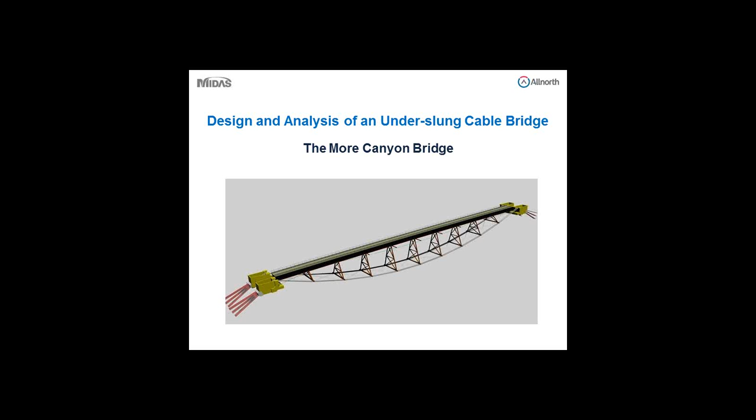The main topics we'll be discussing today are the challenges involved in the design and construction of an underslung cable bridge. These challenges include the derivation of the main cable shape and length, the construction sequence of the semi-rigid structure, the girder launch itself, and the dynamic response of the bridge under wind and live load.

Do you have a question?

Hello. The owner of the bridge are the Galore Creek Mining Corporation.

Okay, actually, we'll answer that question at the end. Okay.

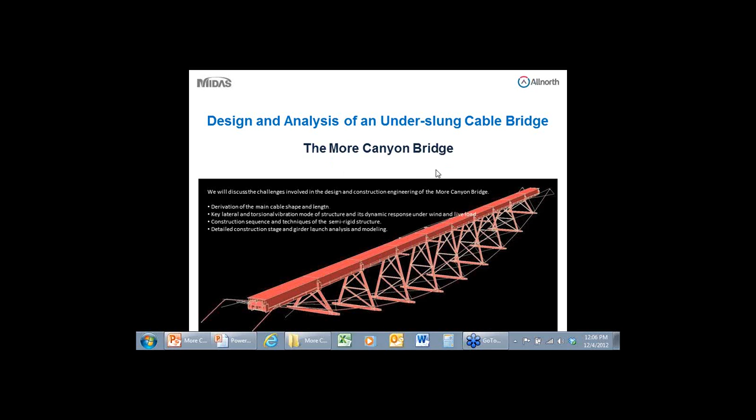Before we start on details, let me give you a brief description on the background of the project. The More Canyon Bridge is a part of the Galore Creek Mining Project located near northern BC, near Bob Quinn and Stewart. It's part of a mining road that will service the Galore Creek mine.

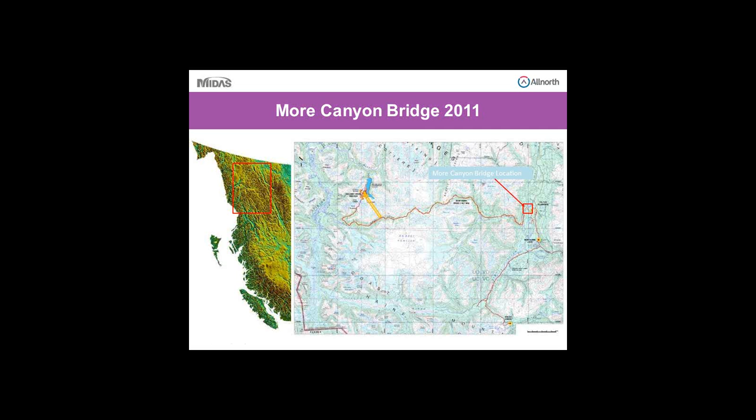The More Canyon Bridge will span an 80-meter deep canyon. It's a 200-meter clear span underslung cable bridge. Apart from the geography of the site, the project is complicated by high winds, which are funneled down the canyon, heavy snow accumulation during winter, and a steep mountain rock face.

Now, this meant that any work to be done would preferably be limited to the top of the canyon. The underslung cable design satisfies the criteria. The bridge should be constructed at the top of the canyon with skylines and the main girder to be launched onto the semi-stiff structure composed of the main cable and the launch girders.

Now, due to the nature of the design, the bridge requires a unique construction sequence and could potentially be sensitive to wind and live load. Because of these concerns, a comprehensive study of the dynamic response of the bridge was completed during the design process, resulting in a design that greatly exceeds a scope that's typical of a 30% design.

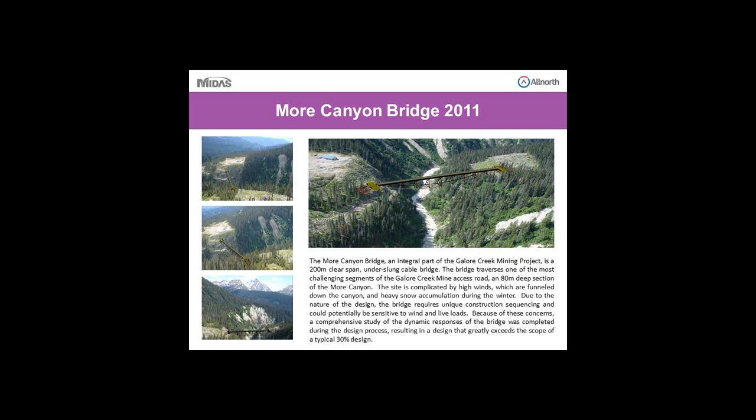Now, the bridge is composed of two 2.5 meter deep composite main girders supported by vertical struts at 20 meter intervals. The main cable system consists of two groups of four 105 millimeter diameter cables. Now, these groups of cables sit 14 meters apart and are cross-braced with 35 millimeter diameter cables to provide a strong lateral truss system. In addition, there's two 75 millimeter diameter wind cables at the elevation of the girder.

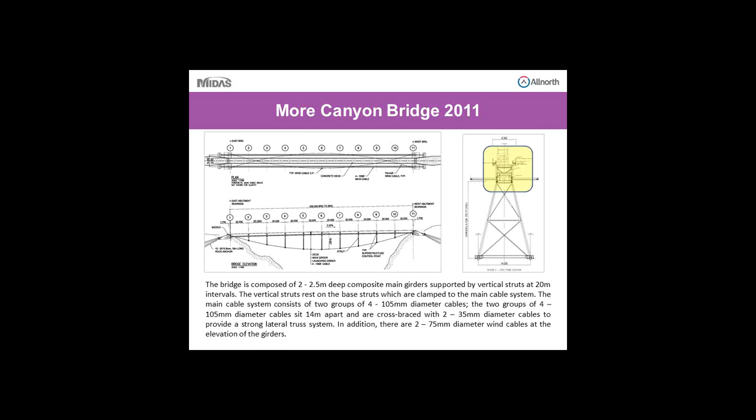Let's have a closer look at the roadway detail. Here we have the composite main girders supported by vertical struts at 20 meter intervals. The main girder sits on top of the launch girders.

We'll later see how the launch girders will first be erected to create a semi-rigid structure as a base platform for the main girder to be launched over. The height of these vertical struts varies from 4.7 meters nearest to the abutment to 17.3 meters at the midspan of the structure.

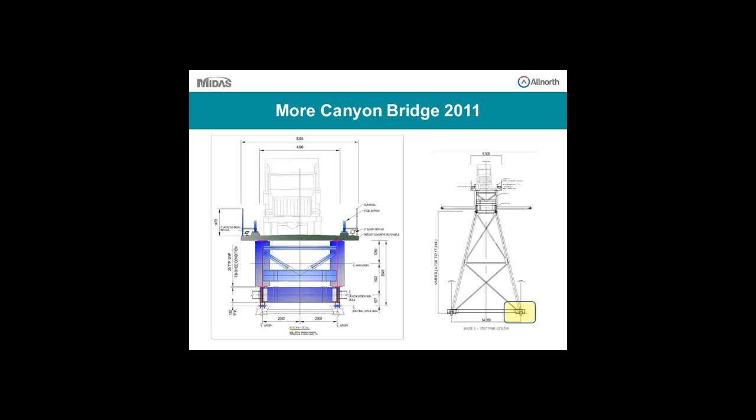At the bottom, we have the struts sitting on the base strut units, which are clamped to the main cable system. Here we can see the rendering of the base strut and clamp system, as well as the cross-bracing cables. The cross-bracing cables are both over and under the main cable system. Now this ensures that all resultant forces will go through a common work point in the system.

Initially, the strut beam was designed to be hung from the main cables. You'll see that in most of our model studies. This design was later changed in favor of having the struts sitting on top of the main cables.

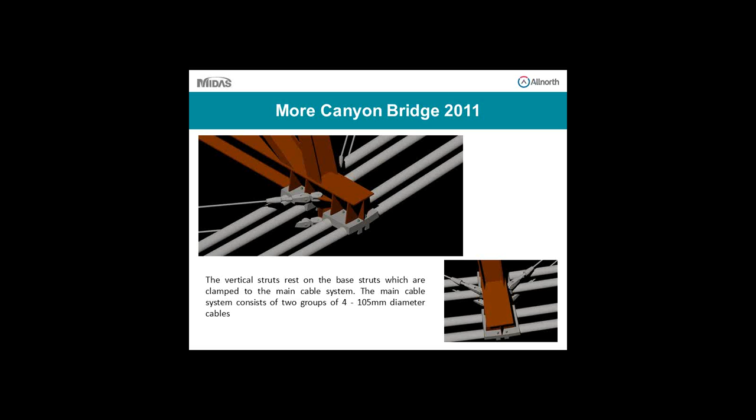A key component of the More Canyon Bridge project was the implementation of MIDAS as the primary analysis software. MIDAS excels in the analysis of cable structures with an accurate ability to model the nonlinear behavior of the cable stays.

With the shape and length of the cable highly dependent on the weight of the bridge, an accurate accounting of the bridge elements and their weights were established early in the project. And we wanted to use the suspension bridge analysis control in MIDAS to derive the main cable length, shape, and tension in the final condition.

An obvious difference between the underslung cable system and the suspension system is that the tension forces in the hangers are compression forces in our case, in the struts. Other major differences also include the absence of backspans and towers.

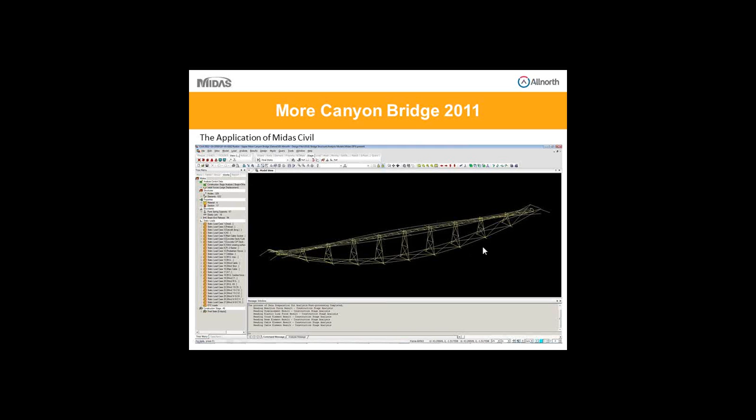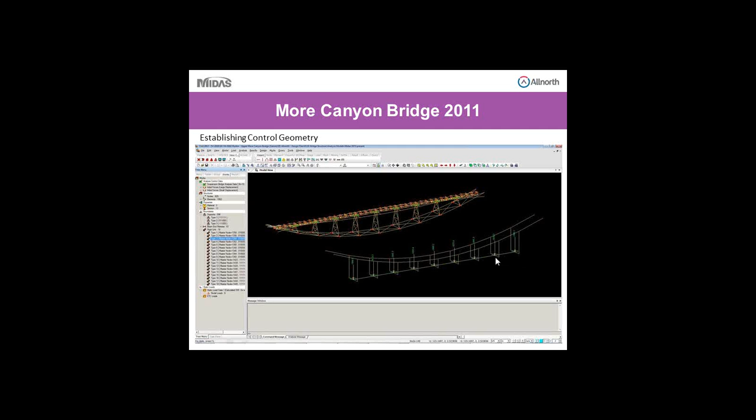Due to these differences, or just our input error, the suspension bridge analysis control was initially unable to compute the shape and tension in the cable based on the underslung arrangement. So we created a suspension model based on our dimensions, along with the calculated dead loads applied along the bridge. We ran the suspension bridge control, and it gave us the shape of the cable and the initial stresses. We then took the cables, deleted the suspension elements around it, and surgically connected the cable to our structural system.

This establishes the first iteration of the forces in the main cable. They include the equilibrium element nodal table, the initial force for geometric stiffness table, and the initial force table. You can find a tutorial from MIDAS on how these tables are produced.

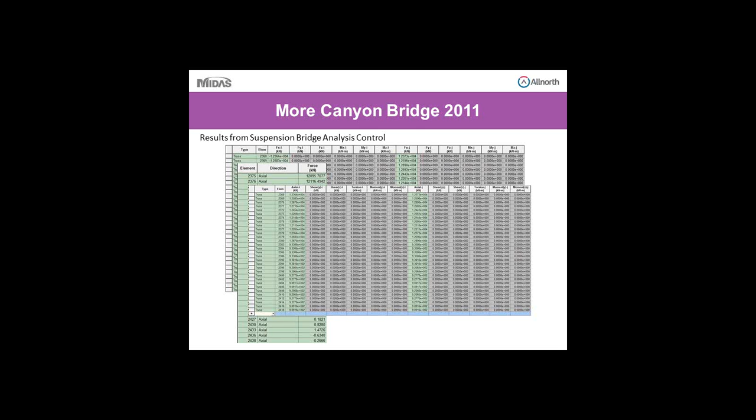With the use of the suspension bridge analysis control to determine the control geometry of the bridge, this is established under an idealized suspension system, where the deck and the main girder is only used to account for the weight and not for the stiffness. So having established the initial forces and the shape, we introduced the data into the construction model.

The basic boundary setup of the construction model is shown here. We have pin support at the end of the cable where it's anchored in rock anchors, and roller supports at the end of girders. Also roller supports to simulate the saddle over the abutment back walls.

Here you can see a rendering of the saddle structure. The strut frames are hinged at the top where they're connected to the bottom of the launch girders, and the launch girders are hinged at their end, so they're simply supported spanning between strut frames.

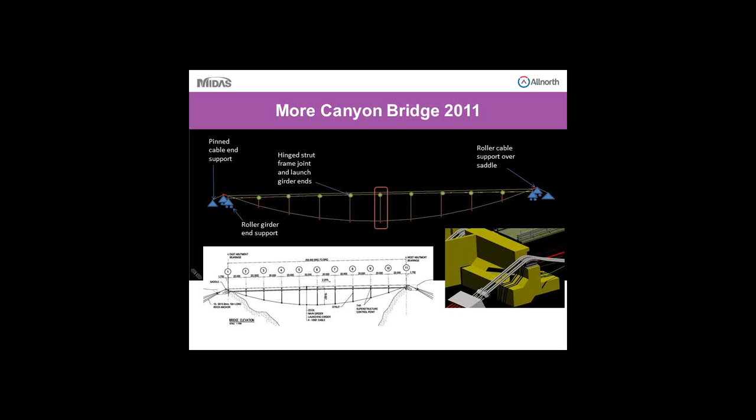Let's have a closer look at the cross-section of the bridge. As mentioned before, in an earlier version of the bottom strut beam design, the bottom strut frame was to be hanging from the main cables. This makes for easy construction because the bottom strut beams will naturally want to hang plumb, making installation with the strut frames easier.

But the hanging pendulum effect will lead to no convergence in the model due to the fact that there are too many degrees of freedom in the system. We get around this problem by using an elastic link between the cable and the bottom strut unit and adding torsional stiffness in this link.

We used a single line element to represent the group of 4 main cables at each side of the bridge. This element is located at the geometric centroid of the cable group.

We also used a single line element to represent the two composite main girders. This was done in order to properly capture the torsional stiffness of the box that's created by the main girder and its lateral bracing system. The torsional stiffness of the box cannot be captured by simple line elements laced together by bracing members.

The torsional stiffness of the main girder system was captured by creating a separate model, modeling the girder and the deck using shell elements laced together with lateral bracing elements, then applying a unit torque at the end of the box, which induces rotation.

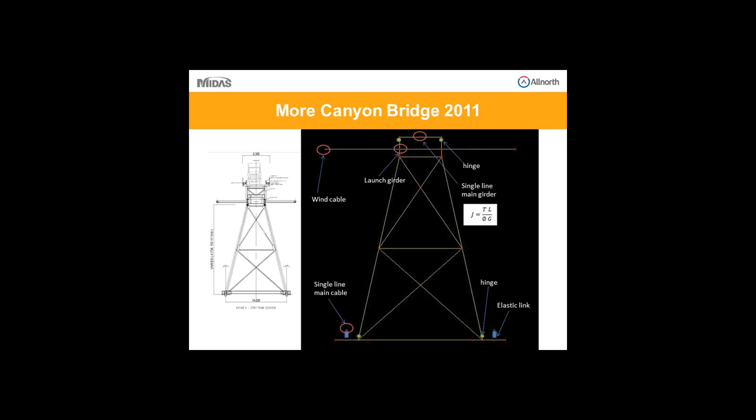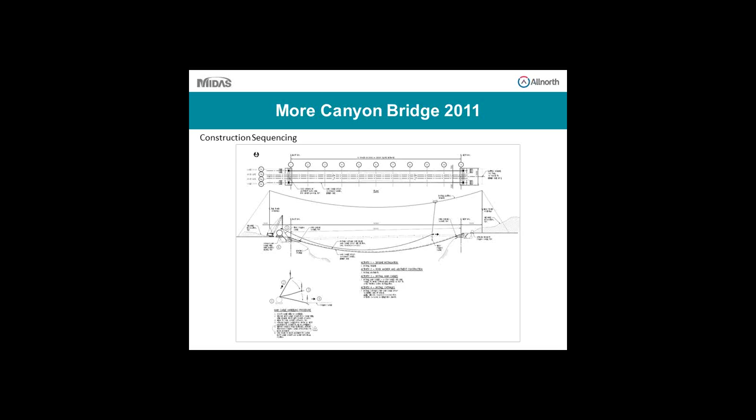It all starts with the construction of the abutments. Groups of 15.9 millimeter diameter strand anchors are embedded 18 meters deep into sound rock. These will provide an anchorage for the main cables.

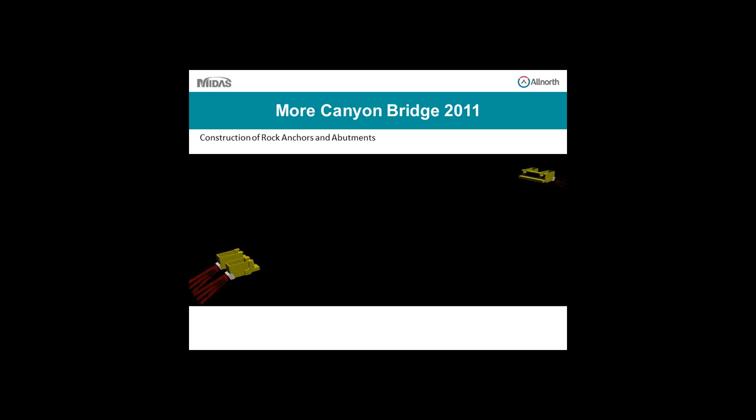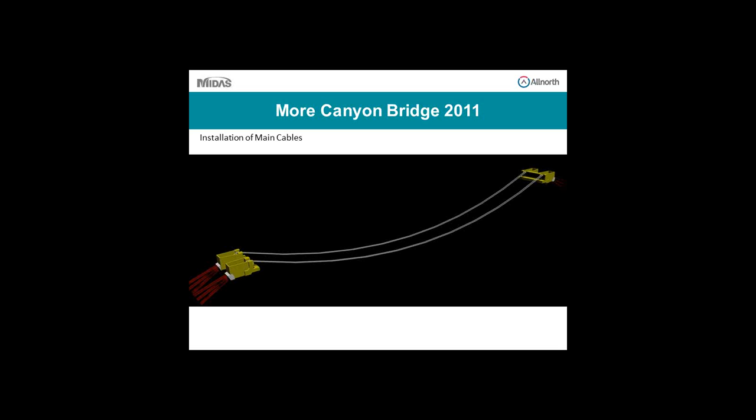105 millimeter diameter main cables are laid into position one by one. Now, the initial position of the cable is approximately 1.2 meters higher than its final position due to the lack of dead load at the initial stage. Additional dead loads coming at a later stage will induce tension in the cable, hence elongating it.

Catwalks made of timber and welded wire mesh will be installed along the two groups of main cables, creating a 1.8 meter wide work platform along the two sides of the bridge.

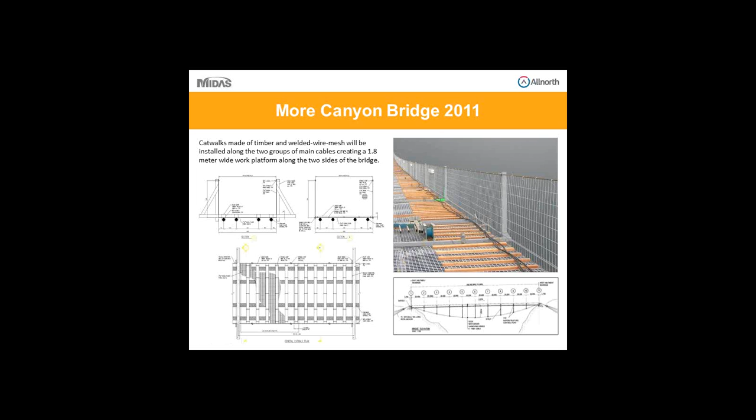The bottom strut beam, along with cable bracing, are installed bay by bay to create a strong lateral truss system and a base platform for future work to be built on.

The exact location of the bottom strut beam will be marked on the cable prior to shipment. This is done because the length of the cable will change depending on the construction stage, as well as the elevation of the cable will change.

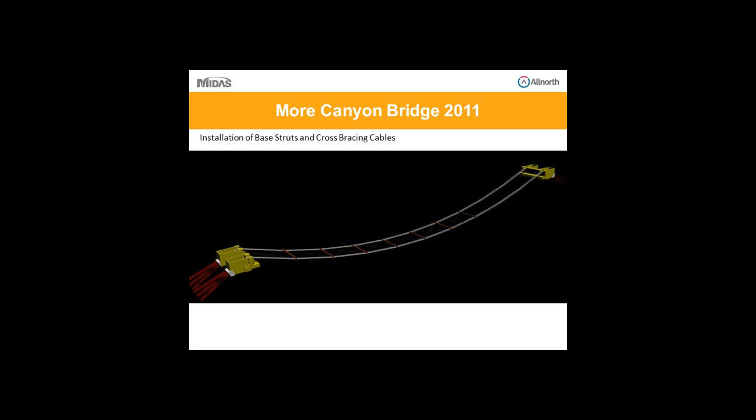Preloads of approximately 8 tons will be hung at each end of the strut beam. The preloads apply additional weight to the system. They stretch the main cable, making it stiffer, and also close the gap between the final stage elevation and the current stage elevation. This elevation change is required due to the rotational tolerance on the members to come.

Keep in mind that each joint installed at the construction stage will need to allow for rotation due to the constant changing of the geometry of the bridge.

The preloads may either be bags of sand, lock block, or water. With these preloads, we can create favorable geometry for future construction stages by adding or removing preloads at certain locations in order to raise or lower the position of bay lines.

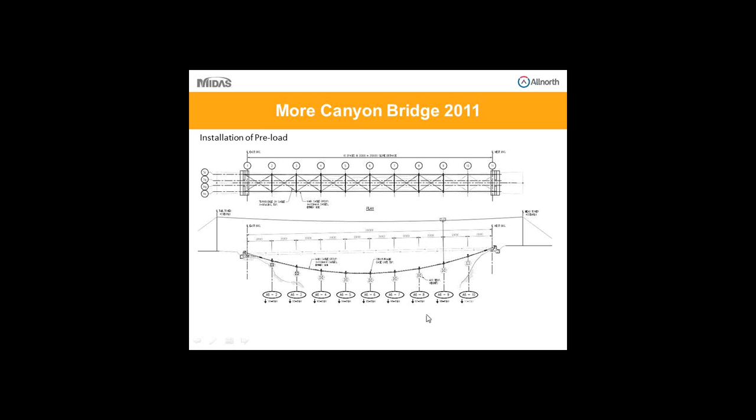The strut frames, as well as the launch girders, are installed bay by bay, starting from bay line 10. The launch girders are installed with a hinge at each bay line so that the system is flexible. The launch girder and the strut frame are to be lifted at once along with their bracing system.

The free end of the launch girder is pin connected to the adjacent launch girder. The system is then slowly lowered onto the bottom strut beam with Tirfors to ensure that it's in line with the bottom strut beam.

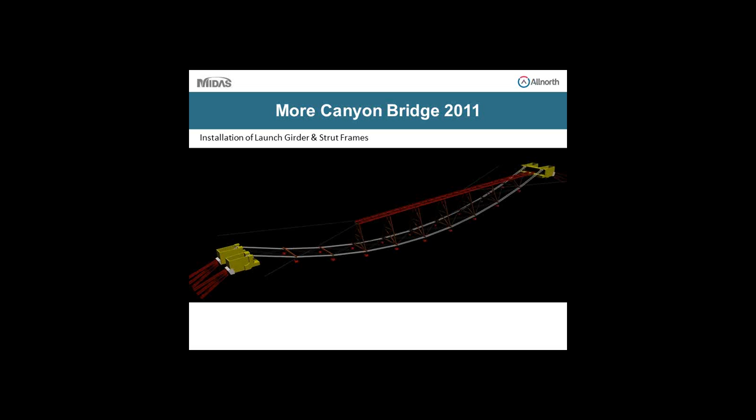The angle at the top hinge at each stage of construction is checked through modeling to ensure that no clashes occur. Cable saddles have a radius on them. By checking and keeping the cable within that radius, we ensure that no excessive stress is applied on the cable during the construction stage.

Wind load at the construction stage is particularly a big concern due to the fact that a significant amount of weight and surface area is added to the structural system, whereas the lateral system of the launch girder cross bracing is incomplete until the last segment of the launch girder is installed.

So during the wind event, the launch girder is essentially cantilevering from the fixed support, that is, from the west abutment. At this construction stage where the launch girder can experience the largest deflection, in order to reduce this deflection, wind cables are introduced into the system.

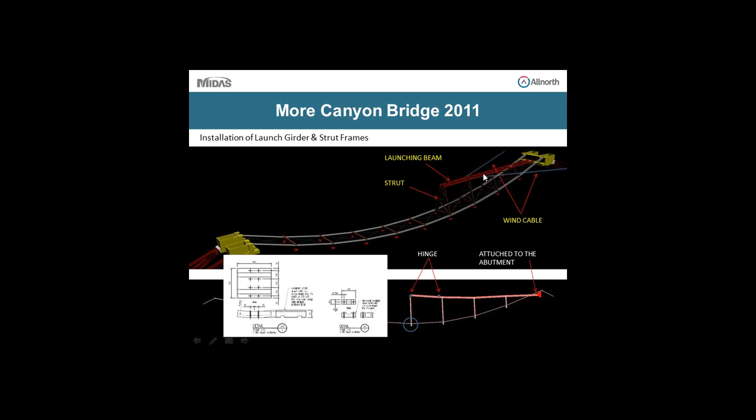Here we can see some lateral deflection results produced in MIDAS at the stage of construction, where the strut and the launch girders are constructed just past the midpoint of the bridge and also just before reaching the east abutment of the bridge.

You can see that the lateral deflection at the top of the truss reaches up to 740 millimeters in the most severe case, and also see how the cable and the strut system rotate to accommodate for this movement at the top, due to the difference in stiffness of the completed main cable system and the incomplete launch girder system.

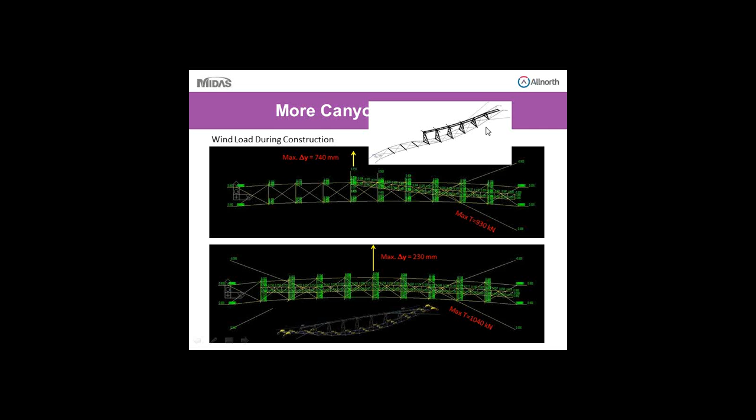Next, the wind cables are installed, strengthening the lateral bracing system at the girder level prior to the main girder launch. Now that the launch girder is complete with its lateral bracing system, it will become a launch platform along with the main cable system.

To simplify each of the models that we're working with, the construction stage model was broken down into 3 models: the pre-girder launch model, the girder launch model, and the post-girder launch model, which also includes the post-CS analysis of the bridge. So let's have a step-by-step look at the deflection of the structure in MIDAS.

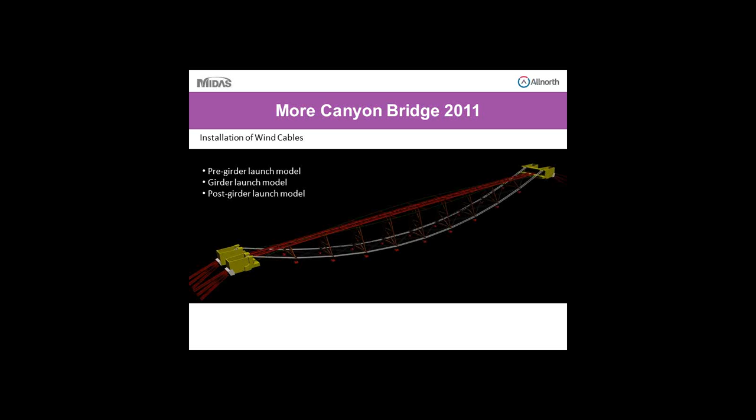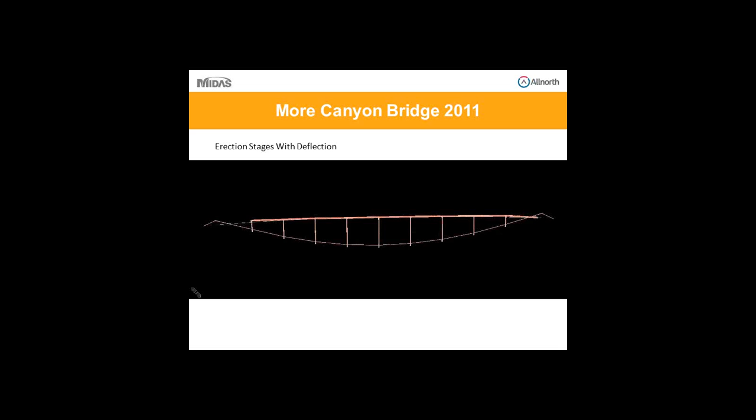The tuning of the preload arrangement through the construction stage had yet to be refined at this point of the analysis. Right now, all preloads are present at the stage after the installation of the strut beam to the end of the girder launch.

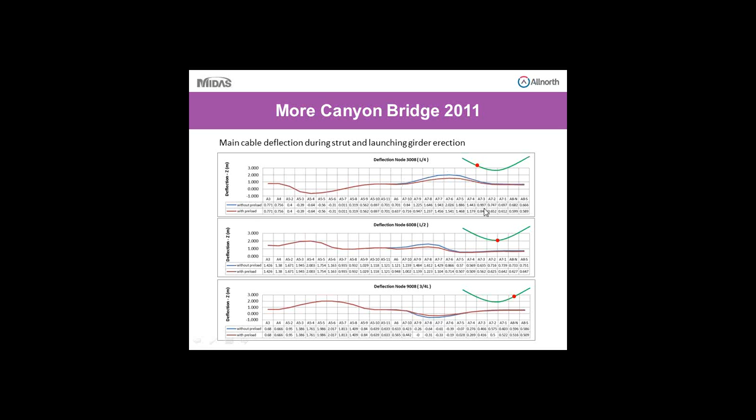Now, there are a number of variables, challenges, and solutions to this procedure. The flexibility of the semi-rigid system composed of the main cable and the launch girders will deflect significantly during the girder launch. This soft platform creates a challenge since it means that the support condition, elevation, and stiffness will be constantly changing. But several solutions have been utilized to overcome these challenges.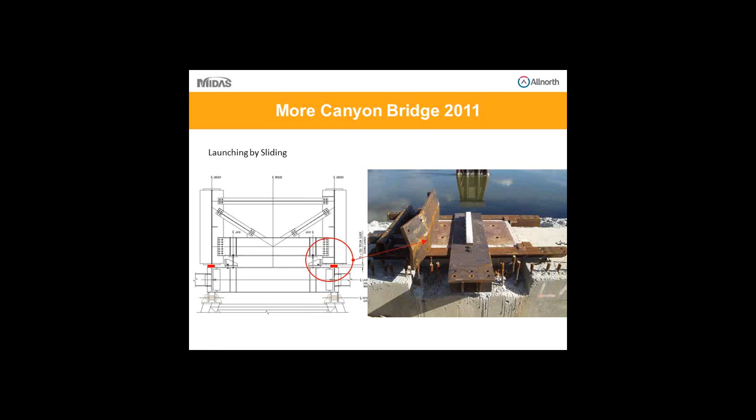A hydraulic controlled launch nose capable of being raised and lowered to match the contour of the launch platform is introduced. A pin connection, a hinge connection between the first and second segment of the main girder, as well as the last and second last segments. These hinges create flexibility in the main girder system. This is important because of the difference in stiffness between the main girder and the launch platform.

A stiff main girder and a soft launch platform can create an unpredictable support condition. Dangerous conditions can exist in the main girder if they lift off between supports. This can increase the stresses in the main girder significantly.

Now, there's also the possibility of using the flexibility of the launch platform to our advantage. By rearranging preloads, we can raise and lower the platform contours to counter the deflected shape and create favorable conditions.

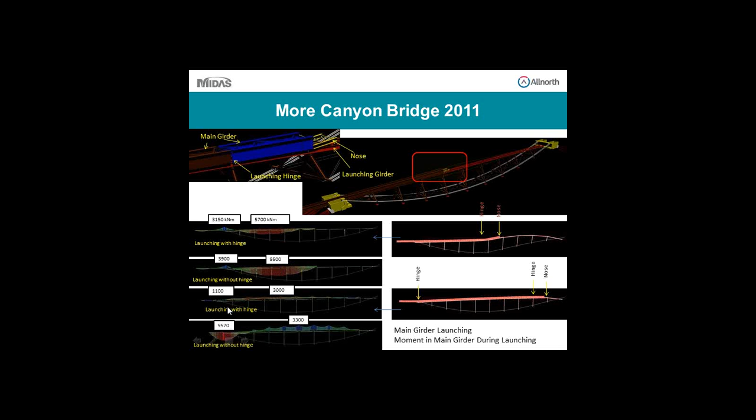Studies have been conducted comparing the main girder with or without a launch hinge. Here you can see that the bending moment in the main girder is significantly reduced due to the introduction of the launch girder hinge. Here we can see the positive moment that's reduced at the front, and here we can see the negative moment that's reduced at the rear.

You can see here that the launch hinge utilizes the full splice connection bolt holes to provide a temporary hinge. At the end of the launch, the hinge will be closed by tightening the top and bottom clamp rods, then installing the full moment splice.

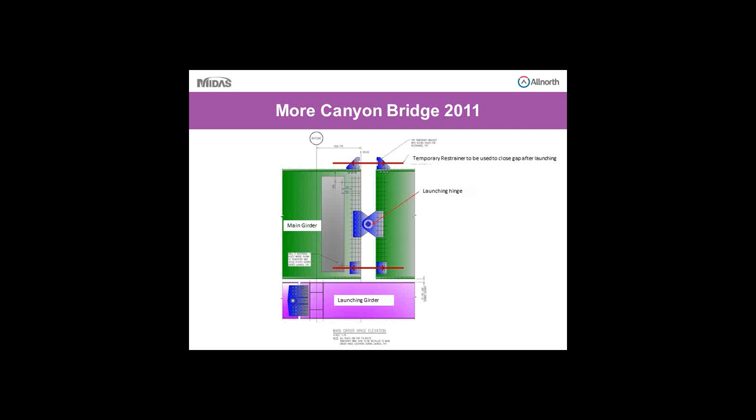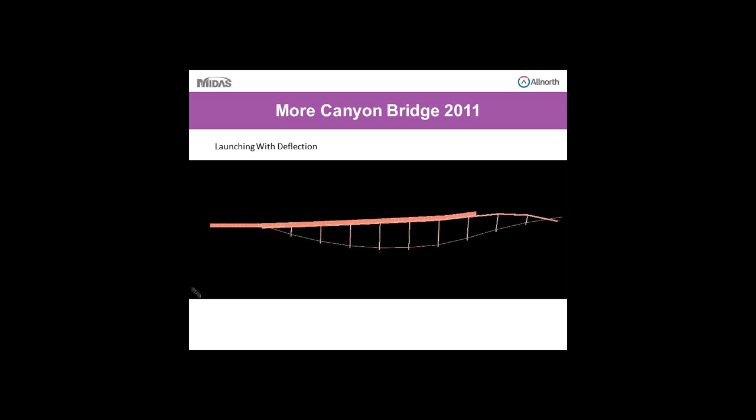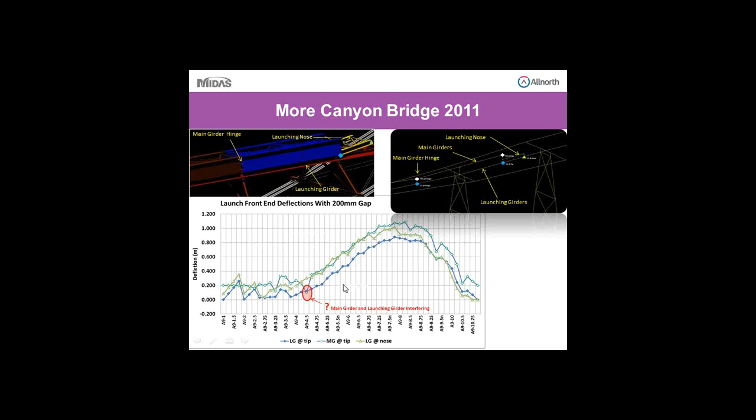Now let's look at the step-by-step deflection in MIDAS throughout the bridge launch. Here we can see the deflection of key locations in the bridge throughout the launch. The graph represents the deflection of the launch girder and main girder at the main girder tip, as well as the launch girder at the launch nose tip. Where these deflections meet, that means there's a clash in the system between the elements. Future launch models can then be revised to resolve this clash.

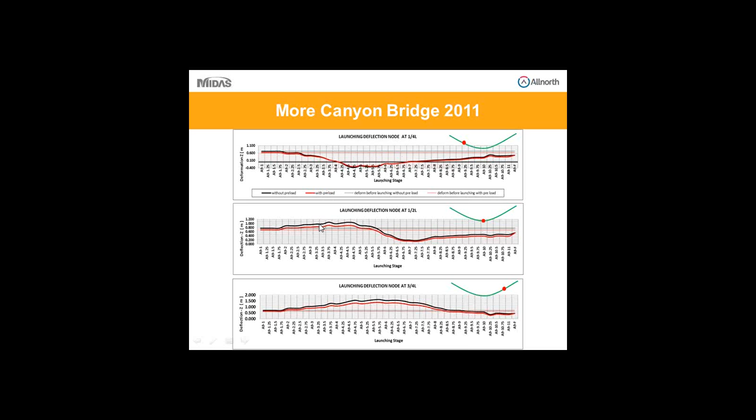Here we can see a graph of deflection at the quarter point of the bridge, and how it behaves with and without preload during the girder launch. Again, the vertical axis represents deflection, and the horizontal axis represents the step-by-step construction stage. You can see that, in general, the change in deflection between stages is much gentler with the preloads.

The tension in the main cables gradually increases throughout the construction stage. Here we can see the graph of main cable forces at each construction stage as load is added. The vertical axis represents the tension force in the cable. The horizontal axis represents the step-by-step construction stage, as well as some post-construction load cases, including ice load and snow loads.

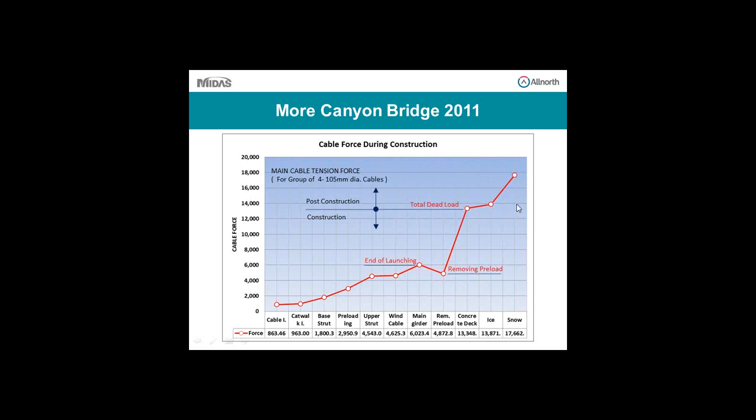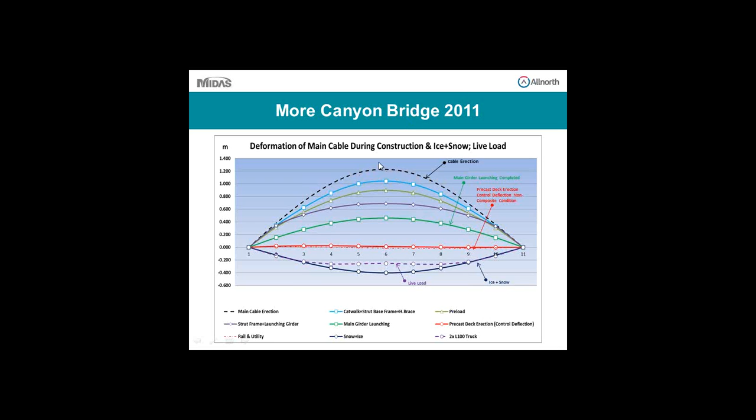Now, the dynamic behavior of the More Canyon Bridge was closely studied in the 30% design. Primary concerns involve the aerodynamic stability of the structural system. We wanted to look for and avoid instability such as flutter, a self-exciting aerodynamic instability that can involve large amplitudes of torsional motion and vertical motion, as well as a coupled motion. Vortex shedding is a vibration that can cause serviceability and fatigue life concerns. And we also wanted to look for galloping, which is similar to the effect at the Tacoma Bridge.

For this purpose, Derek Kelly and Stoyan Stoyanov from RWDI were acquired to conduct the wind tunnel study for the More Canyon Bridge. We're also concerned about the live load excitation of the bridge. Primarily, we want to investigate the appropriate dynamic load factor that should be applied. For this purpose, a rolling stock analysis was performed.

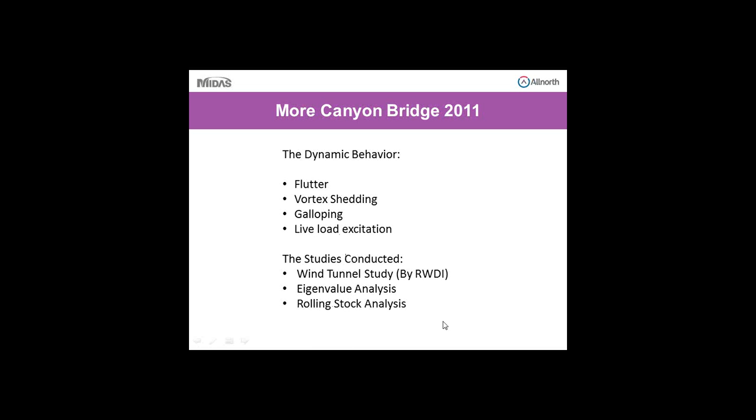Early in the design process, an eigenvalue analysis was conducted on the design. It's a model where we study the period of oscillation between various modes of vibration, with a particular focus on the first vertical mode and first torsional modes, and the ratio between the two. The closer these two modes are together, the more likely dynamic effects, such as flutter and galloping, can occur.

Therefore, it's of particular importance that the torsional stiffness and behavior of the bridge was captured accurately. Part of capturing the torsional stiffness was to model the bridge system with an accurate torsional stiffness composed of the box effect of the main girder system. Another part was to be diligent in taking into account the polar moment of mass that exists in the elements which don't contribute to stiffness but contribute to mass. This is where the center of rigidity and the center of gravity are offset from one another.

In our case, additional rotational mass was added along the center of the main girder. This is applied using the nodal mass function in MIDAS.

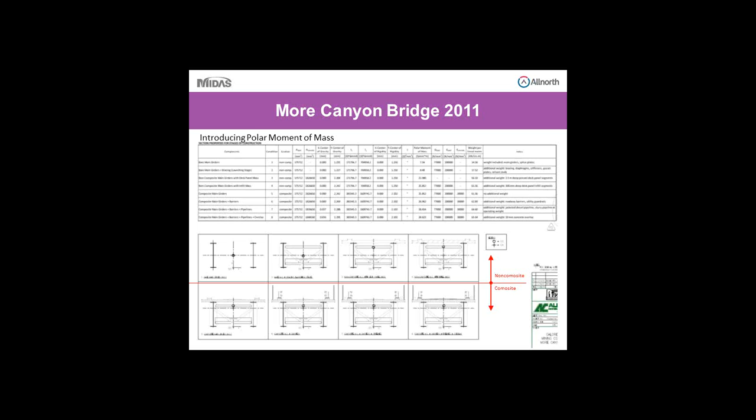Now let's have a look at some of the vibration modes created through MIDAS. We start with the critical construction stage vibration. Here we have the first vertical mode. Here we have the first lateral mode. Here we have the second vertical mode and the first torsional mode.

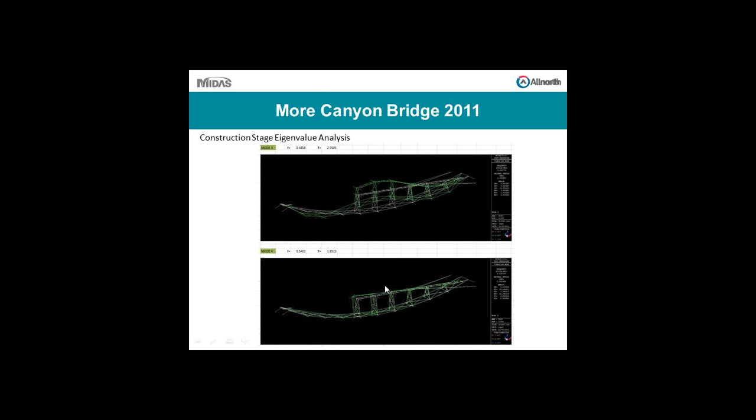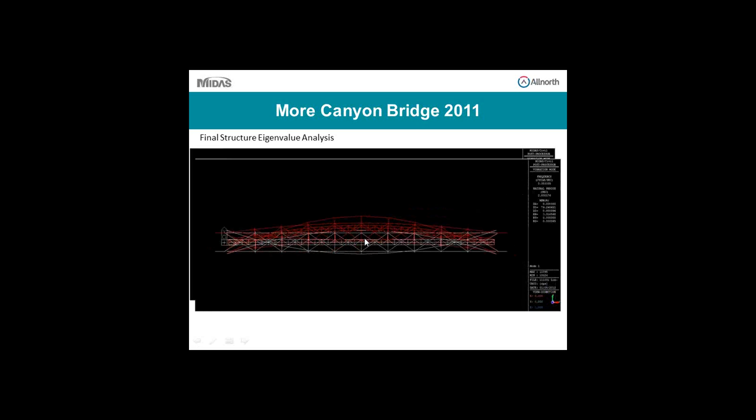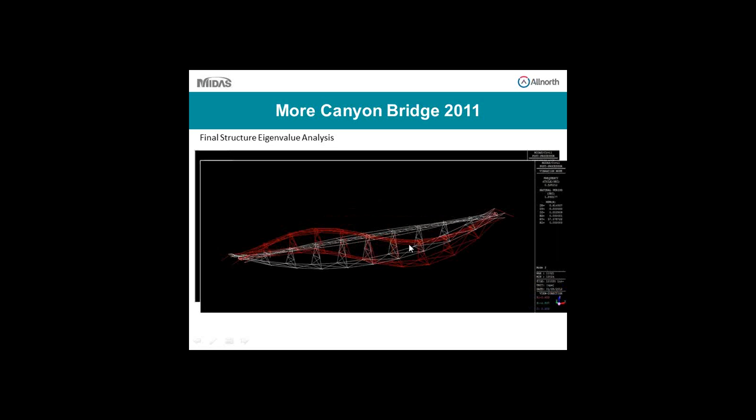Now we look at some vibration modes for the completed structure. This is the first lateral mode, looking from the top and from the end. You can see that there's a little bit of rotation in the system as well. Here we have the first vertical mode, the second lateral mode, and the first torsional mode.

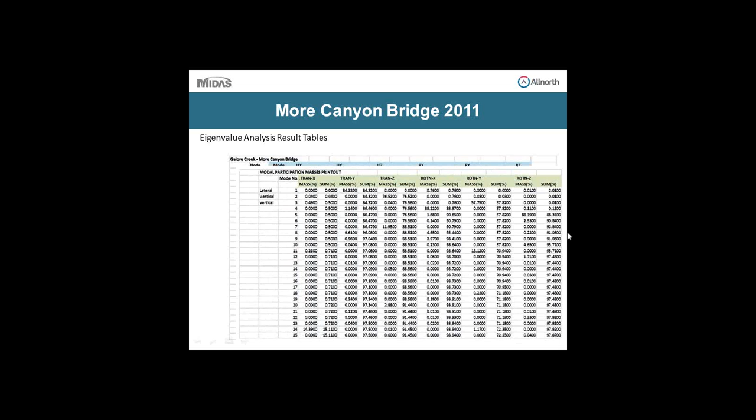MIDAS compiles the output of the eigenvalue analysis, and here we can see the frequency of each mode. As you can see, the ratio between our first vertical mode and our first torsional mode is approximately 1.4. Ideally, you want to be in the range of 1.4 or higher. Then there's the mass participation table. These are all very useful information for us and the guys at RWDI.

RWDI was engaged to conduct the wind tunnel study of the More Canyon Bridge. The natural mode shape, frequency of the bridge, topographical data, as well as meteorological data were provided for RWDI in order to conduct the topographical study, buffeting analysis, as well as a sectional model test.

A scale 1 to 3,000 topographical model of the More Canyon terrain was produced to study the effect of the canyon on the wind load at the location of the bridge.

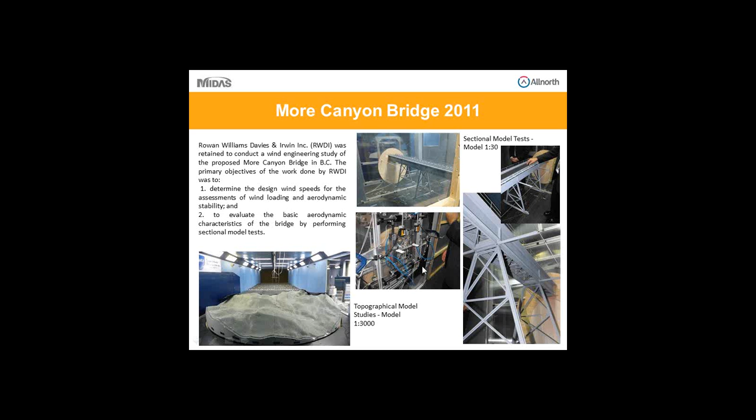A scale 1 to 30 sectional model was created for a 60-meter segment of the bridge to study the aerodynamic stability of the bridge cross-section. The sectional model captures the characteristic height of the bridge, mass of the section, the first vertical, lateral, and torsional vibration modes of the bridge, and the vertical and torsional stiffness and dampening of the bridge was captured using air springs at the ends, which make up the end condition of the model.

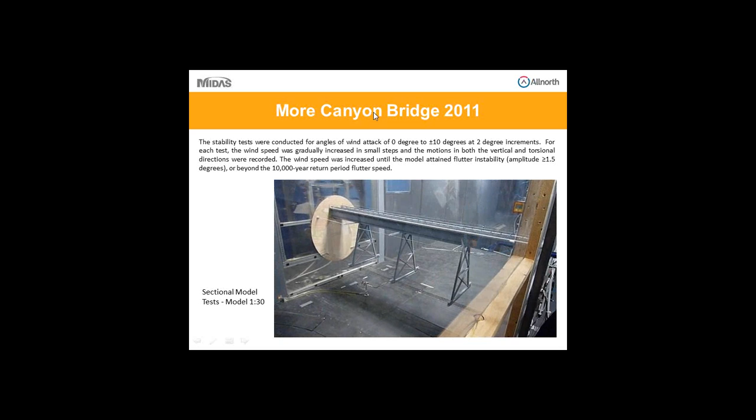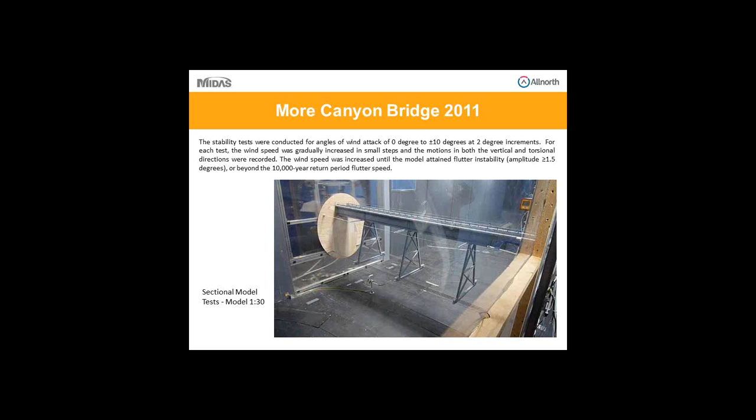Here we can see the sectional model in the wind tunnel. Variables in the wind tunnel testing include wind speed, angle of attack, vertical dampening and torsional dampening, as well as smoothness of turbulence in the airflow.

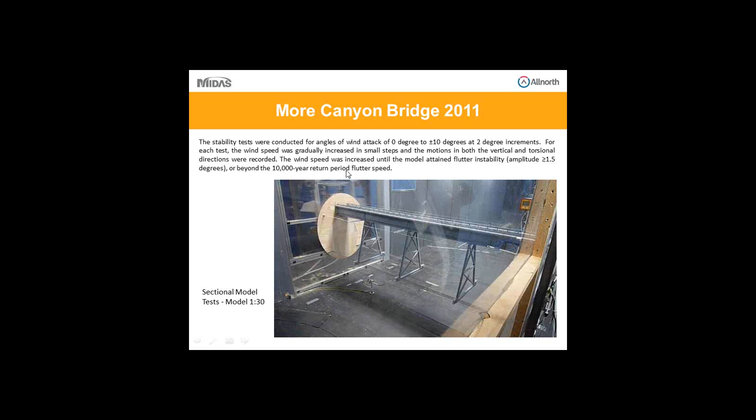The percentage of dampening in the structural system is a critical unknown to the study. The level of dampening can dramatically change the result of the test, but unfortunately, the dampening can only be accurately measured once the structure has been constructed.

You can see that the motion is created by hand at the end of the bridge. We're just testing the stiffness of the bridge by hand. You can see that the bridge is quite torsionally stiff.

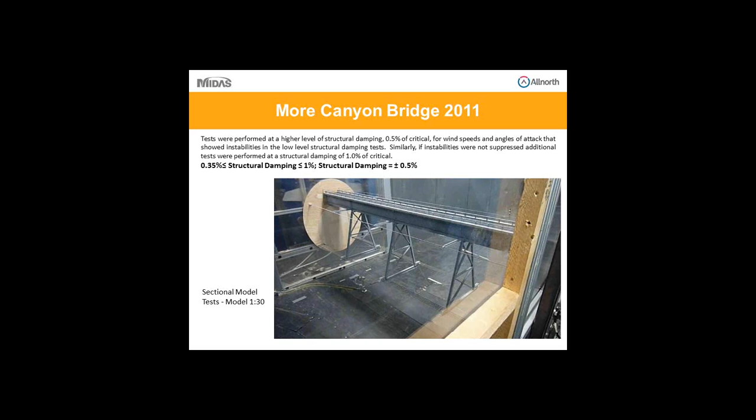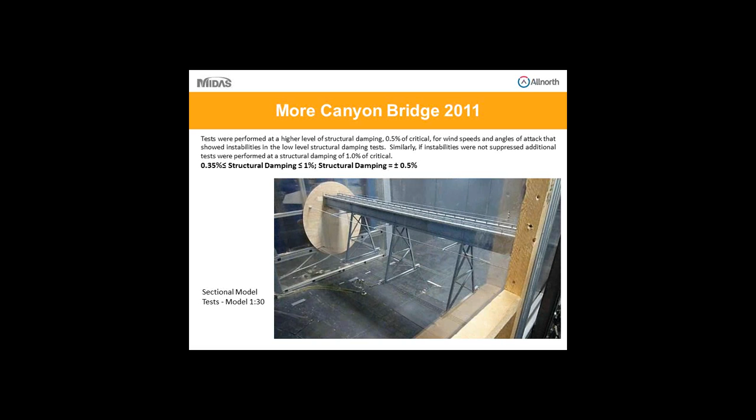Vortex shedding was discovered as an effect that can occur at a 1-year return period wind event. This does not create a critical load effect, but it can be uncomfortable for occupants. It's a serviceability issue. No flutter was detected, but galloping can occur under very low structural dampening. However, a slight increase in structural dampening or increase in turbulence in the airflow can suppress the galloping.

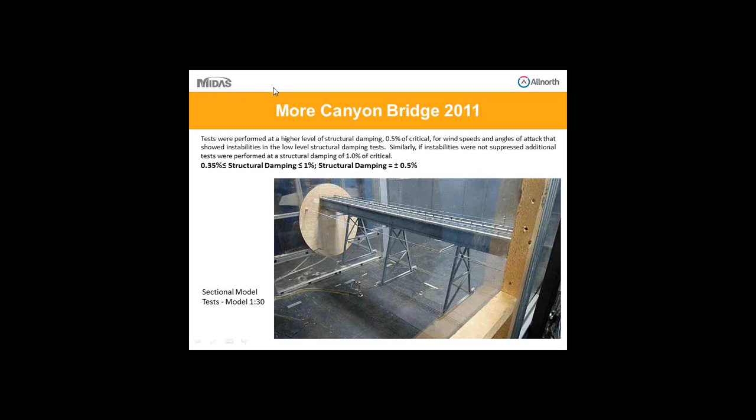They found that for the More Canyon Bridge, due to the effect of the canyon terrain, the local wind is likely to be very turbulent.

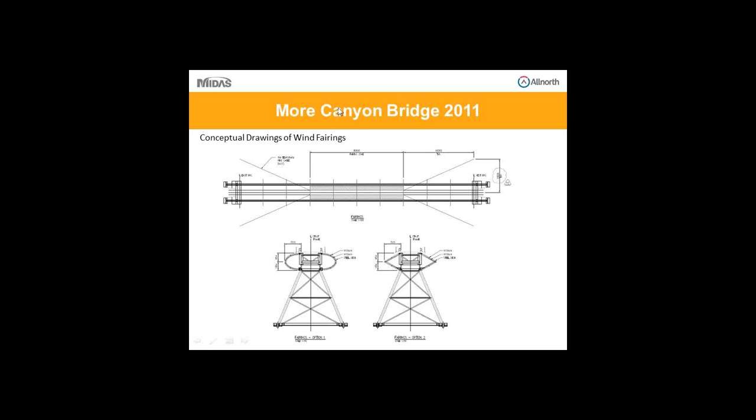Mass dampers and wind fairings have been recommended for the More Canyon Bridge in order to create a favorable response during wind events. Here we can see some concepts of the wind fairings that are applied over the mid portions of the bridge.

The results of the RWDI studies come in various wind load combinations. These combinations have been amplified by the buffeting effect, which is a high frequency instability that can induce an impulse of load increase. 10 wind load cases were applied in the final model, but here we can see an example of one load case that is applied.

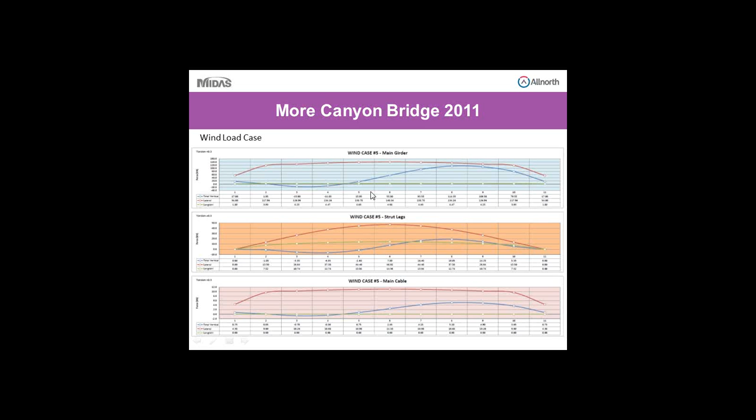So the rolling stock analysis for the More Canyon Bridge was performed in MIDAS. For our bridge, we were concerned about the live load excitation, and this is associated with the dynamic load factor that's appropriate during the analysis of the bridge components.

We studied the effect of the vehicle running at different speed, spacing, and eccentricity from center line of the road. The rolling stock analysis is a time history analysis with a forcing function of the moving vehicle. The forcing function represents the loading which is applied by the vehicle on a single node with respect to time.

As you can see here, we have an example of the forcing function. On the vertical axis, we have the force applied. The magnitude is the force applied by each truck axle. The horizontal axis, we have time. The time spacing depends on the axle spacing of the truck, the distance between trucks, and the width of tire contact area that we assume.

This forcing function will be applied on the node along the main girder. For our model, there are 801 nodes spaced at 0.25 meter spacing. This spacing is due to the tire width that was assumed for the analysis.

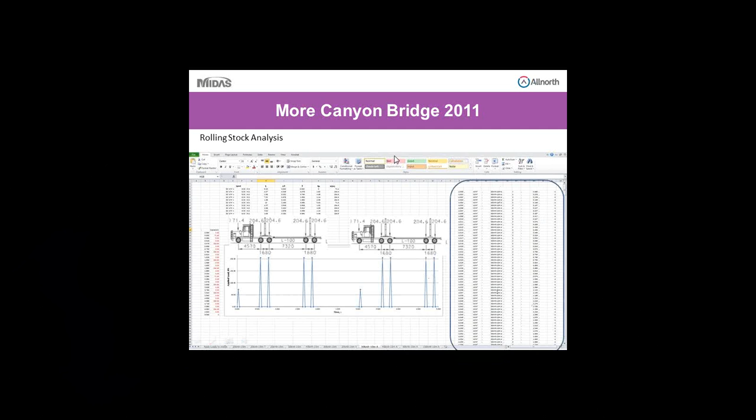So for this purpose, we created inputs like on a spreadsheet, like you see here, and utilized the MCT function of MIDAS. The MCT function is basically the analysis model that's displayed in lines of code instead of a graphical display. In this case, this was very helpful for us, where we could copy and paste lines of code from the spreadsheet into a text editor.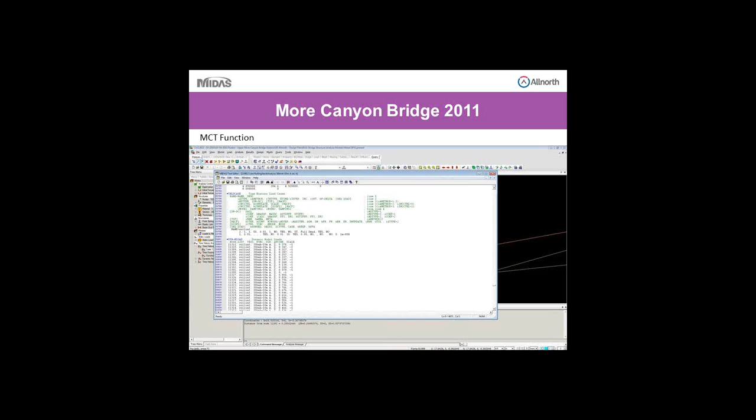Here we can see the rolling stock analysis in action in MIDAS.

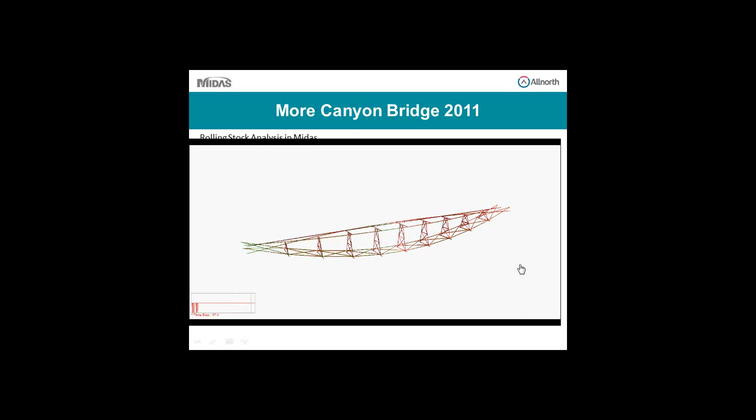Now this is a graph produced from the results from MIDAS. The graph represents the effective live load on the node that's 3/4 point down the bridge. The vertical axis represents magnitude of velocity, displacement, and acceleration in meters and seconds. The horizontal axis represents time in seconds.

You can see here that the vehicle enters the bridge here, and the elevation of the node elevates as the cable tension increases. And as the vehicle approaches, the node slowly deflects, and this is where the vehicle is at the 3/4 point of the bridge. And here is when the vehicle leaves the bridge.

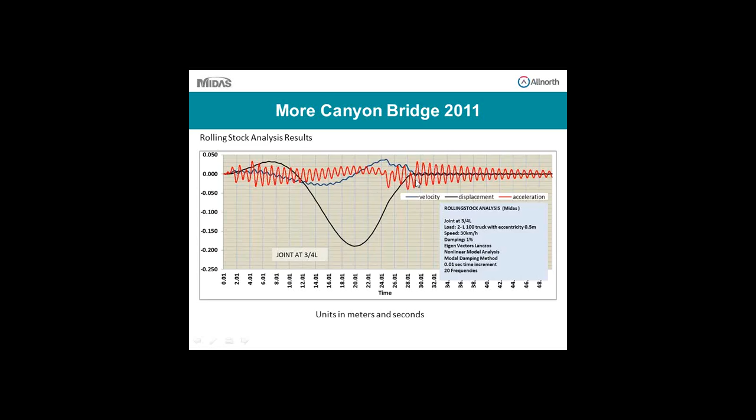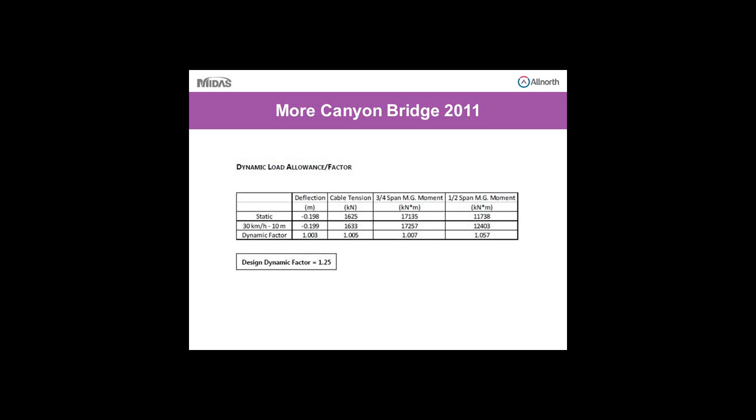So overall, we find that the bridge is not very sensitive to live load excitation. But that's not to say the surface of the bridge will be perfect and there won't be bumps on the road. Therefore, we still apply the dynamic load factor of 1.25 as recommended by the bridge code.

Here we can see the bending moment diagram on the main girders as the truck travels across the bridge.

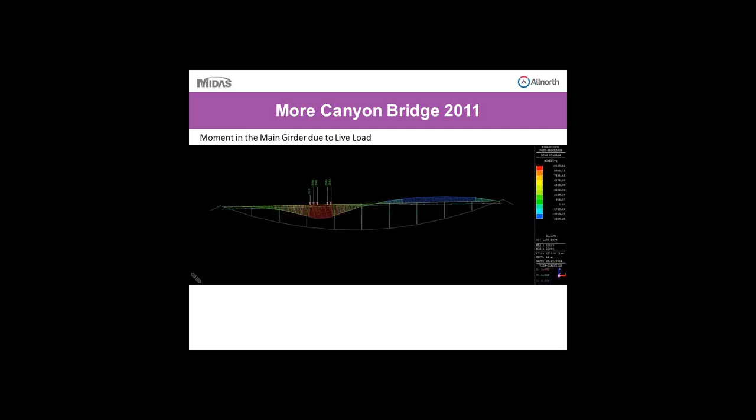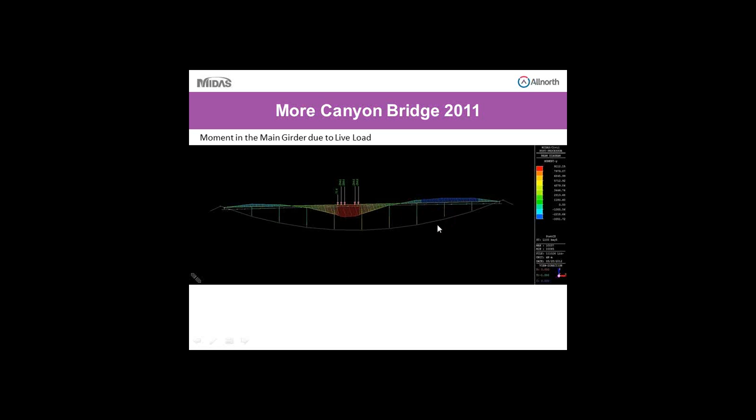You find that the girder experiences positive bending, tension on the bottom, where the truck is positioned. And everywhere else on the bridge, it's negative bending, which is tension on the top. This is due to the fact that the live load stretches the cable, and the cable straightening where less load is applied, pushing the strut frame upwards and producing negative bending in the main girders.